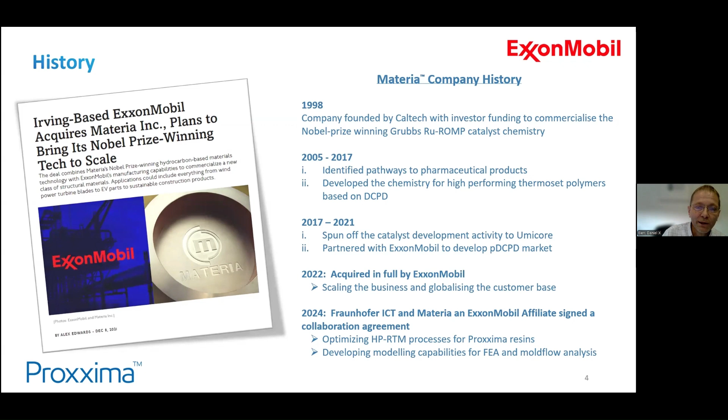Because of the chemistry, it's only hydrocarbon, very hydrophobic, and has very good chemical resistance, especially towards acids and alkali, but also towards other hydrocarbons - we've done some good tests on that. The reaction, being a metathesis - ring double bond opening and recombination - has a relatively low exotherm, which I'll show you later. It also has a good operating temperature range, and that's basically the trick with the system.

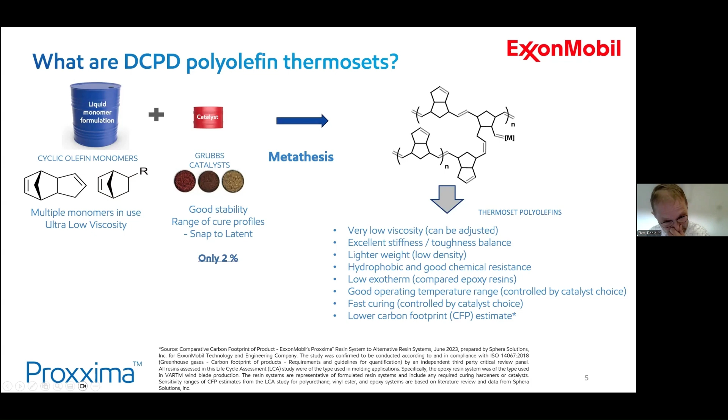By using different catalysts, you can control the pot life, control the curing temperature, and so on, which gives a lot of flexibility. Once it starts curing, it cures very fast - I'll show that to you later - and it has a very low carbon footprint. I'll show you some data later, and there are also options to recycle. Here's a bit of an illustration of what the DCPD polyolefin thermoset could mean.

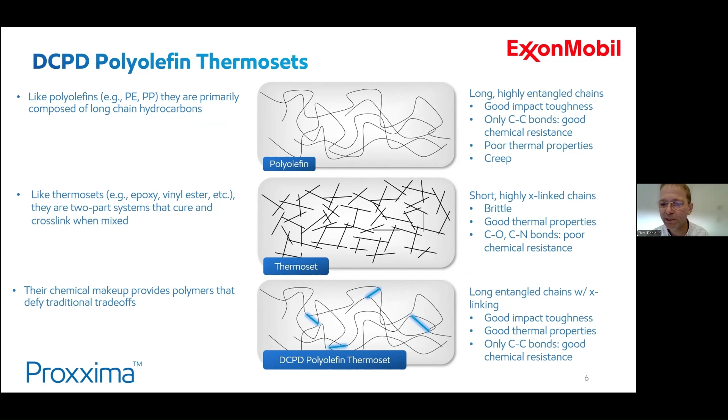When you think of polyolefins, you probably think of long hydrocarbon chains, which give good impact toughness but have poor thermal properties. On the other hand, you have highly cross-linked chains in a thermoset, usually with heteroatoms, which gives poor chemical resistance. The DCPD polyolefin thermoset gives a good combination, good impact toughness, but also very good chemical resistance.

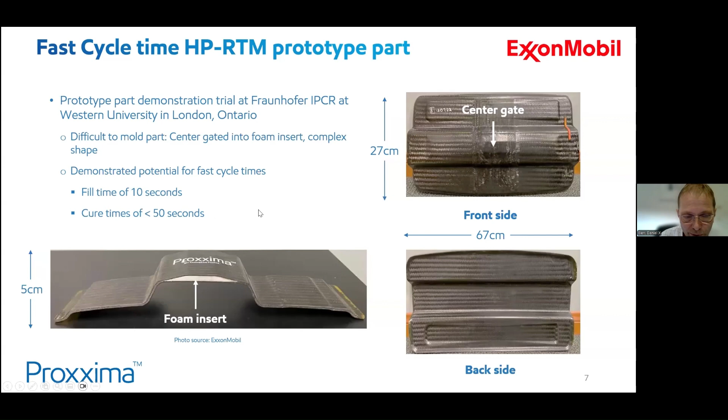So I promised to give you a few examples. This one is a quite complex part we made with high pressure RTM processes. You see there's a foam insert, so it's quite complex geometry. The fill time, because of the very low viscosity, was only 10 seconds, and cure time less than 50 seconds. You can imagine the potential in RTM processes.

Typically we would see improved burst pressure and also improved burst pressure after the drop test. We can do type 4 tanks, but we also think about type 5 tanks where the liner could be DCPD. That's an interesting field where we actively work.

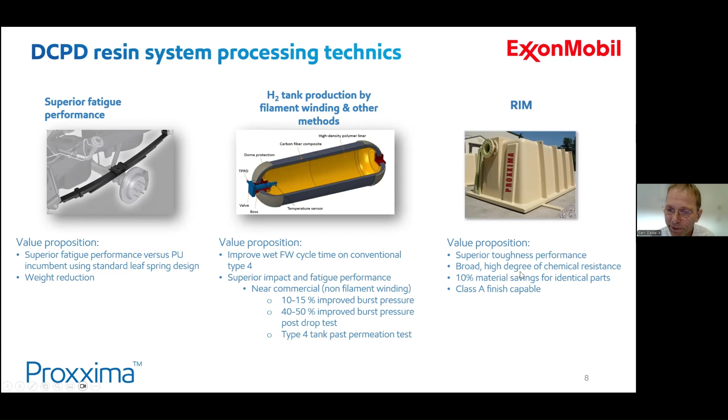RIM is a little bit more traditional for DCPD resins, but there we have long experience. This is the top of an acid tank done by RIM, and that has lasted already almost 10 years. Very good example here.

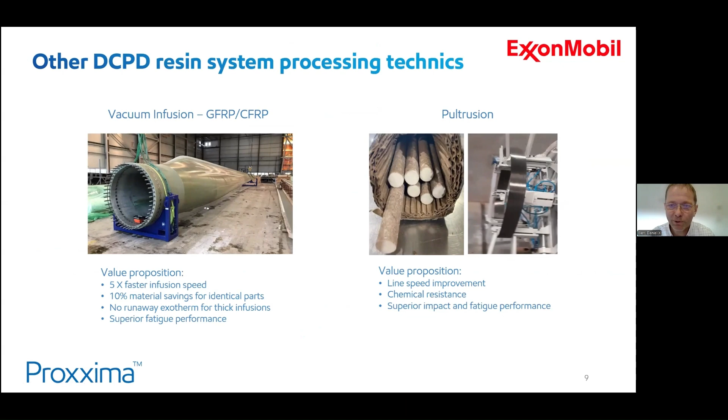As you would expect, due to the low viscosity, we do pultrusion. These are rebars, and again, we have some experience there, and I know I work with some of the CU members in that field as well.

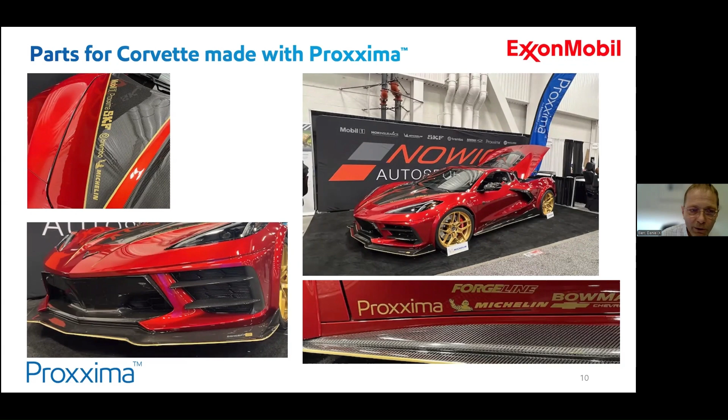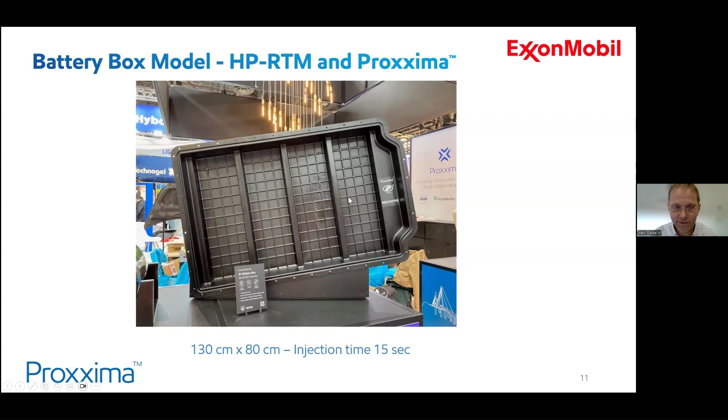So to summarize: again, very low viscosity, 20 times less, very low density for further lightweighting. It is tougher, 5 times tougher, and has a very fast cure.

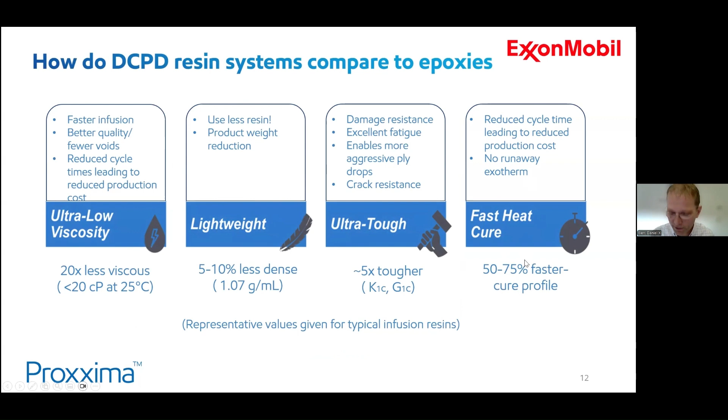Here are a few examples of the toughness. Here's an example of a falling object test, or falling weight test, the impact on Proxxima compared to epoxy - you see the impact is much smaller. Also the crack resistance of Proxxima versus epoxy - you can see you get much higher loads and higher displacement. We have the data behind this, and being a Texan company, we have shot our Proxxima resin, and so it absorbs the impact.

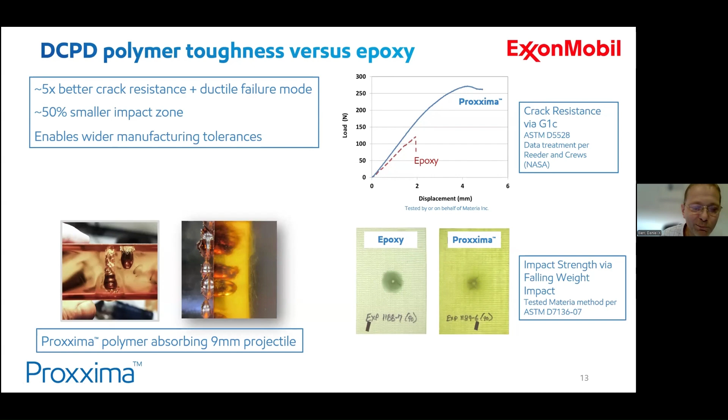Later I can show you a little bit in the video as well. That's actually on the JEC, and that also caught the attention, and we have some more interest in defense, which for sad reasons maybe we will need more in these times.

All right. Should I take over for the collaboration now? Yes, thanks, please. So, hello everyone, nice to be here, have a chance to present to you guys.

What I would like to go into a little bit is the collaboration hub that Daniel already mentioned. At Fraunhofer ICT and Pfinztal, we have established the European hub for all research activities regarding RTM with the Proxxima resin system, that's the DCPD solution by ExxonMobil.

We are currently procuring the HPRTM equipment, so this is very fresh, early days. However, as Daniel mentioned, we already have projects ongoing with different interested parties, and these trials obviously needed a way to make parts, so we have started in wet compression molding.

You can see on the right there's basically a picture from our lab showing visually how low viscous the material is. In this case, it's being applied to carbon fiber fabric, and here permeation, even though it's a dense carbon fiber, is very easy. You may have seen that as well on JEC.

So we showed a couple of plates there. For example, for carbon fiber, we were able to achieve 65% volume fraction in wet compression molding. That's quite high, and we can build on that once the HPRTM equipment is available.

What we're going to be doing in the collaboration hub is focus on the processing parameters, do detailed analysis of the mechanical properties of the resulting composites, and then do a feeder activity to the activities at Exxon regarding the overall LCA and end-of-life solutions for Proxxima, as the RTM application is only one of the various applications for this type of polymer system that Exxon is selling. So we are feeding into that, and for the RTM process itself, we will do an in-depth LCA, gate to gate, able to give you information to evaluate the process and compare it to others.

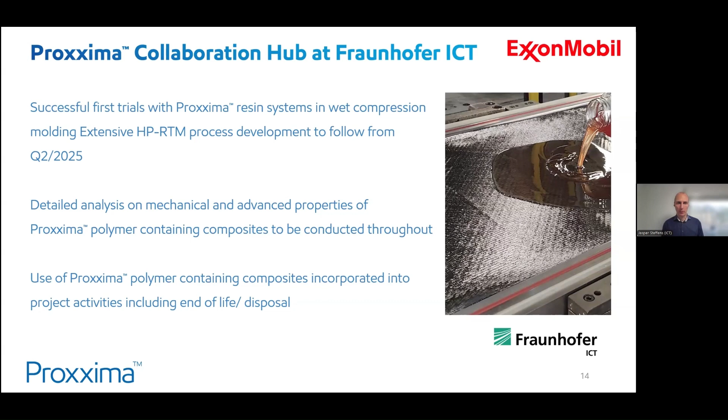On the next slide, we have an overview of what we're planning for this year and the next. As I mentioned, we will have an HPRTM unit coming this summer. We'll then commission it at Fraunhofer ICT, and that is open for customer trials. I mentioned we will do our own trials too, focusing on the process guide that's supposed to result from this - a good handbook to understand all the relevant process parameters to set the process up yourselves.

This is what Exxon is funding essentially for better industry adoption, to take out a lot of the uncertainty early. However, if there's dedicated or specific interest already at this stage, we are more than happy to work on specific projects already.

ICT might be known in this space - we have quite large presses and some base tooling available to make rather economical first geometry trials, but we can always also run customer-specific toolings, and then contribute our analytical capabilities to understand the behavior in those parts.

Finally, at Fraunhofer ICT, we are providing data inputs to activities running at Simutence. Simutence is a spin-off from KIT. They are also quite well known in this space, and they will be working with our data to provide a set of virtual methods to describe all relevant aspects of RTM with Proxxima.

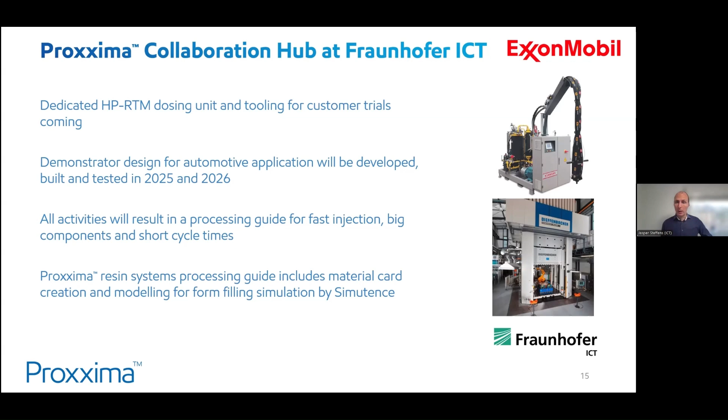We've brought a couple of examples on the next slide. So what we've currently achieved already - we fed the generated data to Simutence for them to build a curing kinetics model, and also to understand the reactive viscosity. This is a quite complex field to model, but we've seen first good results.

Obviously these models will be finalized over the duration of the project, but already now we've seen the first form-filling simulations for improved designs of the part Daniel showed earlier, in addition to understanding the structural performance. We also have first data used to do static and some dynamic impact simulations for a part for the automotive application that will serve as one of the demonstrators in this project.

And all of these solutions - the curing, the reactive viscosity, and running a curing curve, understanding how the behavior would be at different processing temperatures - can all be accessed online. So if there's interest to understand specific process profiles, maybe replicate what you have in terms of set points, see how Proxxima would behave in that regard, do reach out to us.

There are licenses available through Exxon for the Simutence hub that can be found online. You may also direct a request to Simutence directly - they will reach out. So we are working in tandem here on these activities.

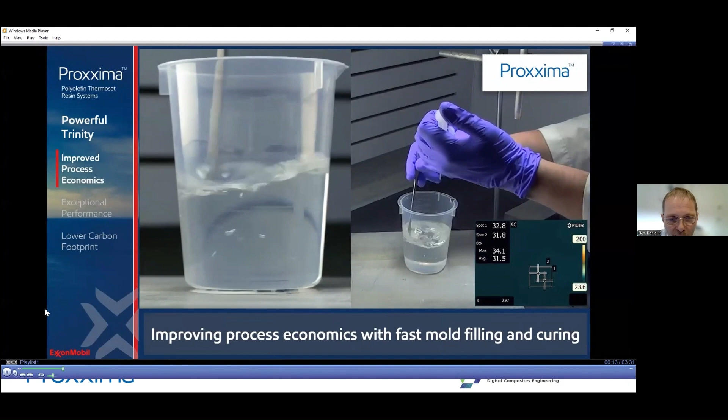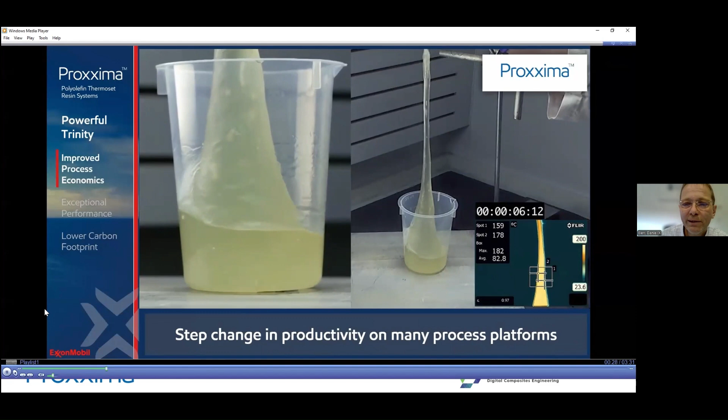So this is a first example. Now you see how Proxxima looks. It has a little bit of viscosity, almost like water. We add the catalyst, and you can see it cures instantly. What you also see is that the exotherm is not that strong. With other systems, you'd have a much stronger exotherm.

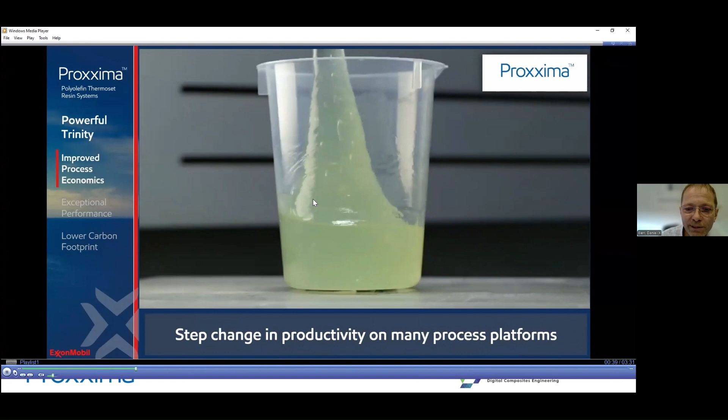Here's a repeat. Gel time is only 3 seconds, and then polymerization takes 6. That's just an illustration—we typically would not use a system like this, but you can see what the potential is.

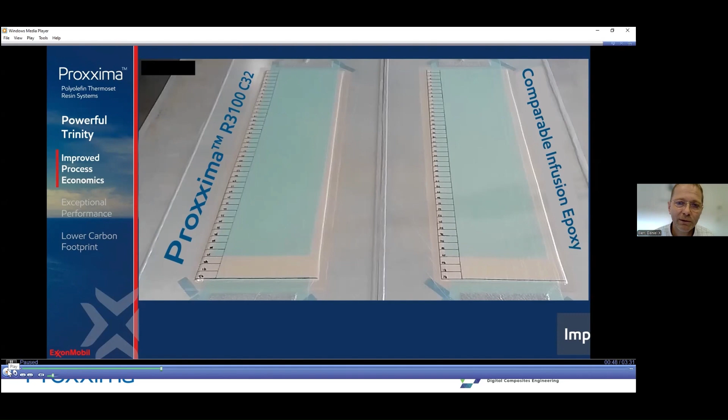So we can use different catalysts, curing at higher temperatures. In RTM, we usually talk about 90 to 100 degrees C. This demonstrates again the low viscosity and what it does, like in the VARTM process.

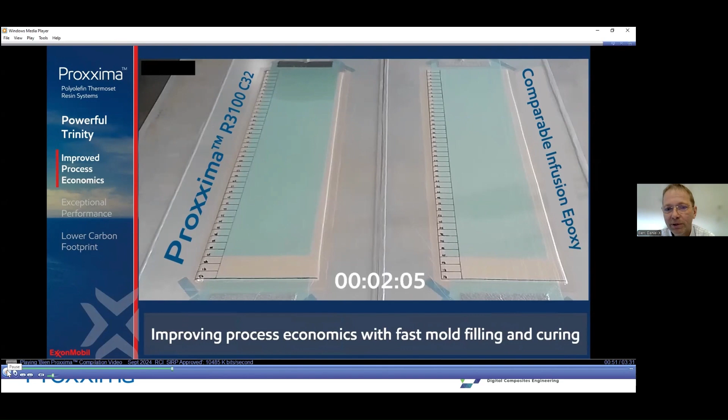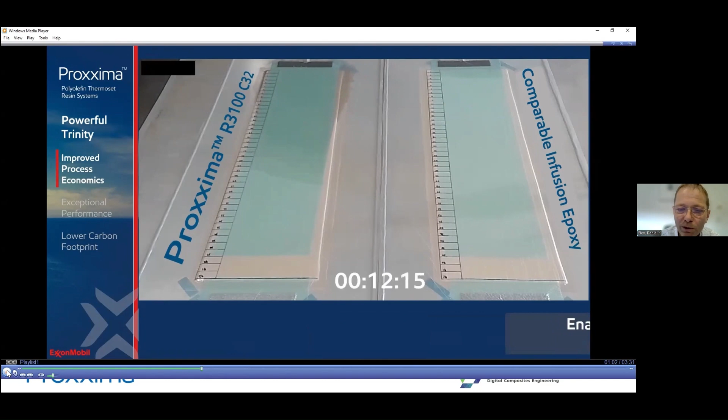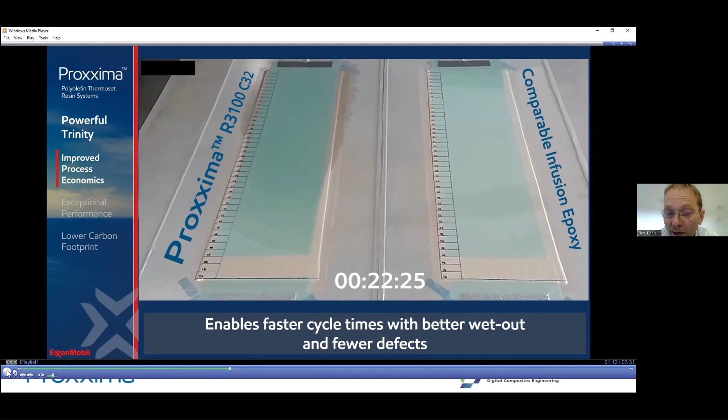This also illustrates the fast mold filling here on the left side, the 3100 with the C32 catalyst. It really races, and on the right side you have a comparable epoxy grade. That's mainly due to viscosity—not a real surprise here.

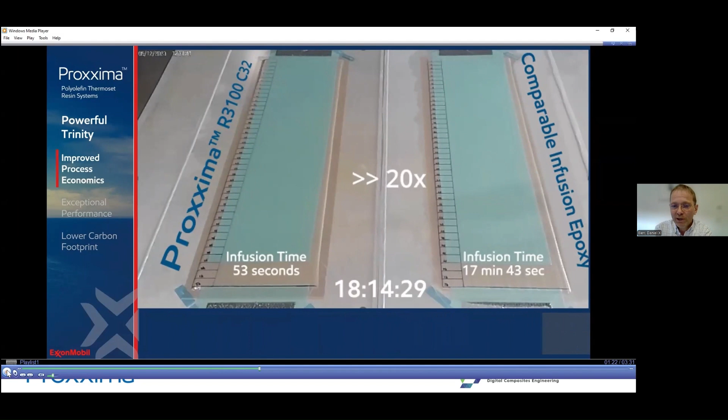In that case, it was like 20 times faster. You remember I showed you the example of the wind turbine, which was 5 times faster in real life. So this is basically what we say: it's in the upper right corner, high toughness and high infusion speed.

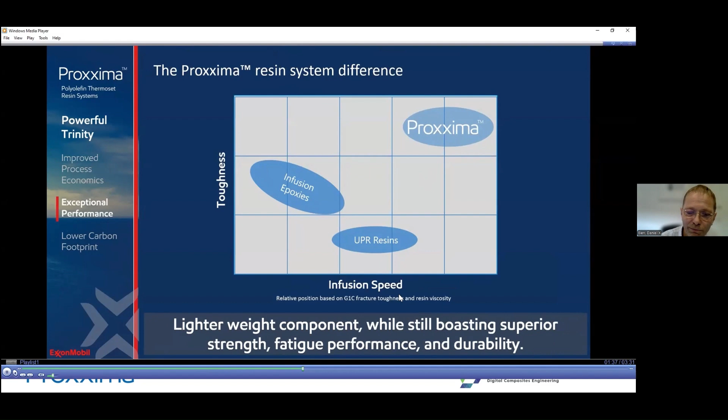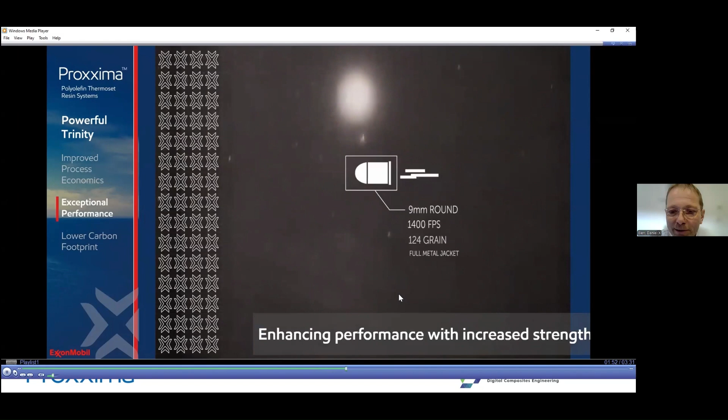As promised, here's a video of the toughness test we did, with the bullet—again, it fully absorbs the bullet.

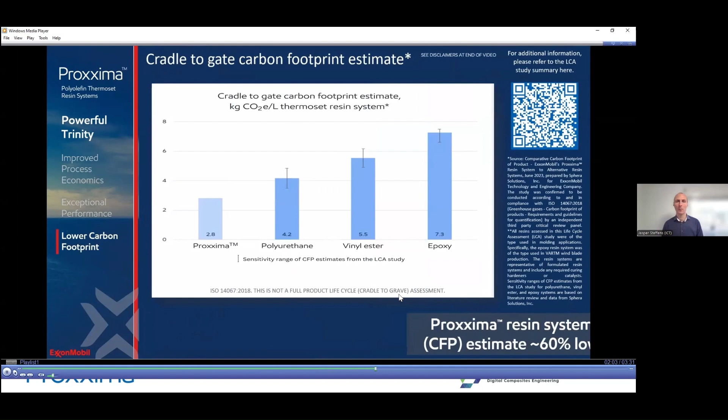Now let's talk a little bit about the lower carbon footprint. What we've done here is the CO2 emission cradle-to-gate, a carbon footprint estimate per liter. Proxxima is at 2.8 compared to an epoxy at 7.3.

Why is that? Because Proxxima, or the DCPD, is generated during naphtha cracking, which is a one-step process—so compared to other processes, relatively low carbon intensive. Obviously, you can also use natural feedstock, hydrocarbon natural feedstock, and go lower here, but this is based on crude.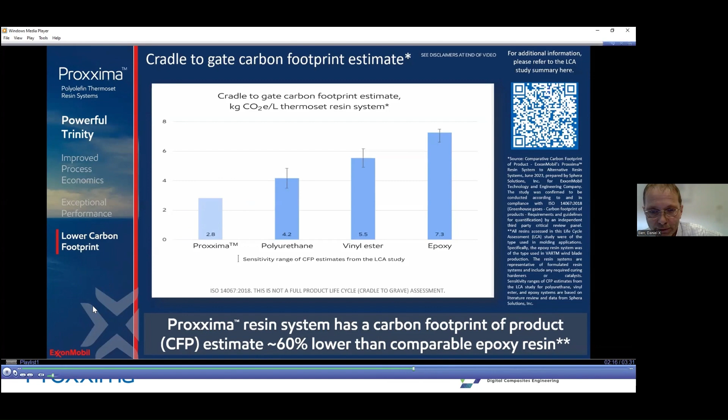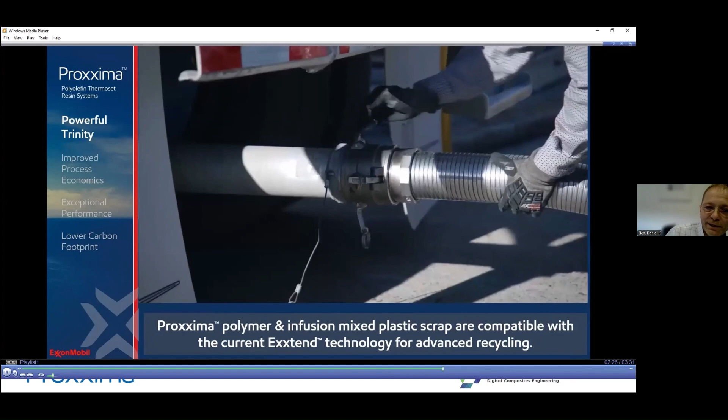So, let's move on to recyclability. Here you see an example of our unit in Baytown, Texas, where we feed plastic waste into our unit.

ExxonMobil is a large polymer producer, probably the largest in the world in terms of polyethylene. So we have a responsibility to take back plastic waste which cannot be mechanically recycled. We've developed an advanced recycling method, and we have JVs to collect plastic waste and take it back into the unit.

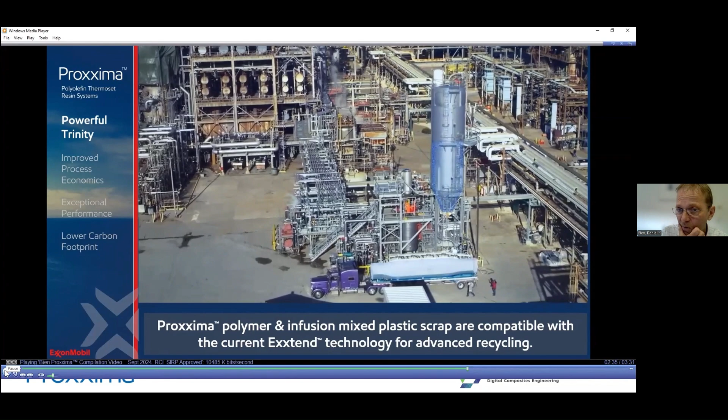Here these are granules—they're fed into a hopper, then suspended in oil and fed into the unit. That's something we've proven also works with Proxxima; we've run that through the process.

There's no surprise, because Proxxima is a pure hydrocarbon, so it can be recycled and brought back into the system. In principle, at one point we may be able to certify via mass balancing—potentially circularity, because it could end up in naphtha cracking as well, but that's not proven yet.

But I can see that being possible.

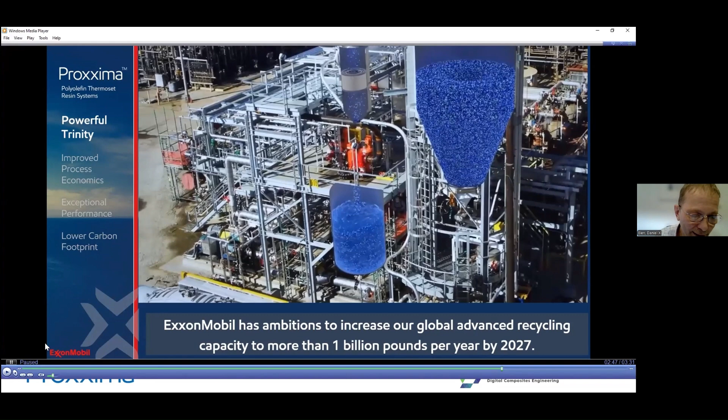Then there's the question of how you separate the fiber from the resin, and we've done some research on that. Textbook methods are pyrolysis or solvolysis, and we've tested them all. We have some very promising leads, which at the moment I cannot disclose, but I've seen the data and I'm very positive that step can also be done very efficiently with Proxxima.

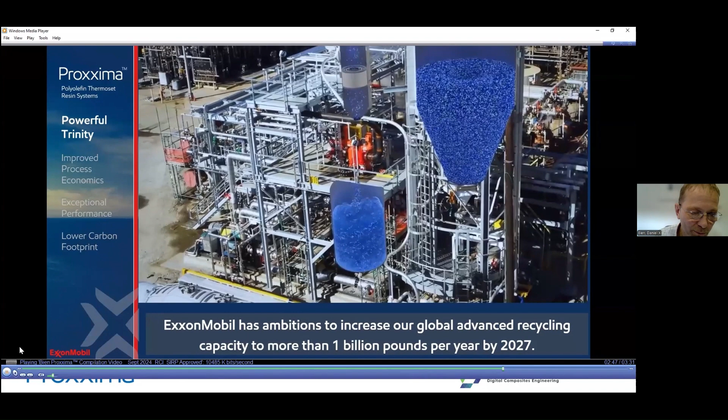Exxon will do 1 billion pounds, so 500 kilotons a year, of recycling by 2027.

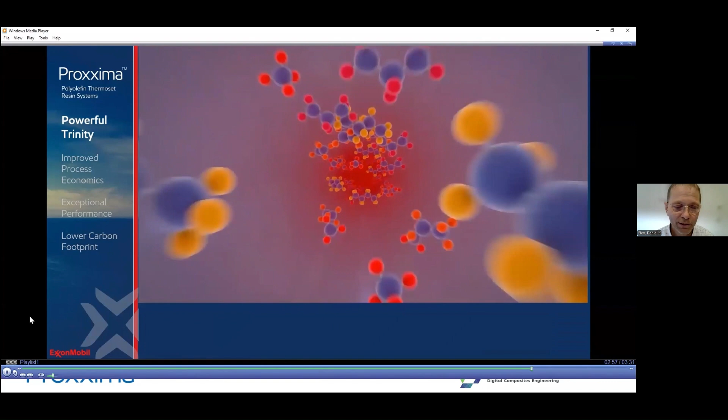So that's basically the summary: we have lower carbon footprint, low viscosity, reduced cycle times, lower weight, and very damage-resistant material with excellent fatigue properties. I hope that entices you to test the material.

We can do that at your site, or as offered, at the Fraunhofer site. I'm very keen to hear your questions and to work with you.